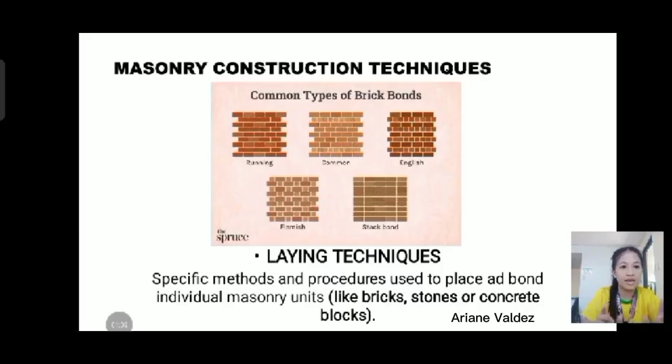While the image doesn't show any actual reinforcement, we can discuss how the different bonding patterns might lend themselves to different approaches to reinforcement, and how their structure affects strength.

Now we have running bond. We need to remember that running bond is the simplest and most common bond. It only consists of lengthwise bricks and vertical joints between bricks. Because we see so many vertical joints, the running bond benefits more from frequent horizontal reinforcements like ladder or truss mesh to prevent cracking along these weak planes. But that doesn't mean we don't need vertical reinforcement. We also need vertical reinforcement at corners and intersections. So running bond is used in residential buildings, garden walls, landscaping, interior, brick veneers, or paving and patios.

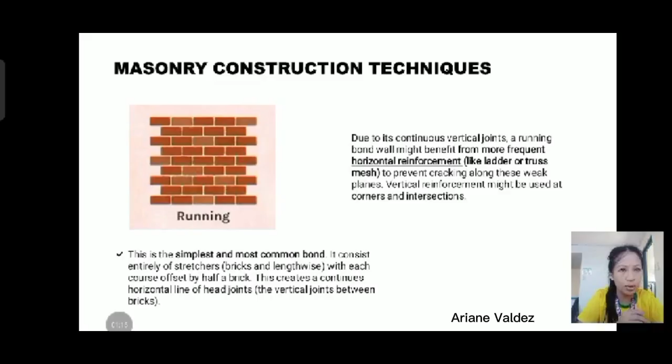Next we have common bond, also called American bond. This bond features courses of stretchers with a header course, bricks laid with their short ends facing out at regular intervals. The header courses help tie the wall together laterally. When we say laterally, there's one row with the long side, then right above or below it, the short ends of the bricks. So looking sideways, there are straight rows of either short, short, short, then long side, long side, long side. So laterally, common bond needs horizontal reinforcement. The difference from running bond is that it's slightly further apart compared to running bond.

When it comes to vertical reinforcement, common bond is the same as running bond. Common bond is used for residential exteriors, historical restoration, garden and decorative walls, and also non-load-bearing walls.

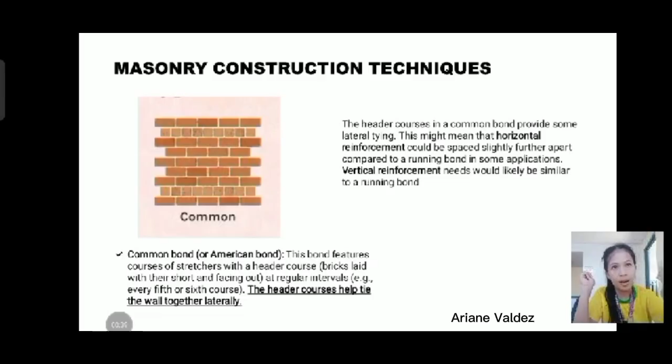Next we have English bond. This bond alternates courses of headers and stretchers. The head joints in the stretcher courses are centered above the stretchers in the course below. This bond is known for its strength. We see headers, then after the headers, long bricks, alternating bricks. This alternating of headers and stretchers creates a very well interlocked wall, offering good inherent strength. This robust interlock could potentially reduce the need for frequent horizontal reinforcement compared to running bond in some less demanding applications.

Vertical reinforcement would still be important in English bond. This bond is used in load-bearing walls, engineering projects, and traditional buildings.

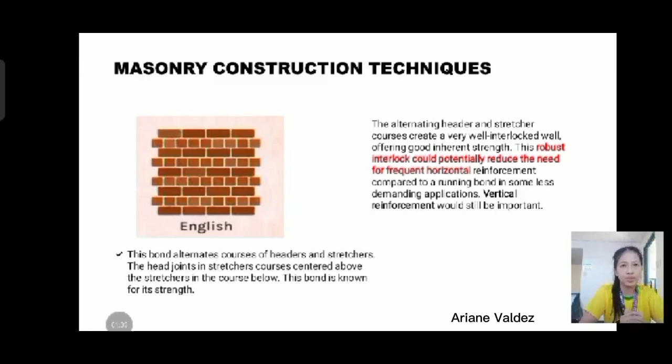Next we have Flemish bond. Here we see the headers, the small bricks, placed right in the middle of the long bricks. Similar to English bond, the stretchers alternate with headers in each course to create strong and well interlocked structures. The potential need for horizontal reinforcement might be comparable to, or slightly less than, a running bond in certain scenarios. Of course vertical reinforcement remains important.

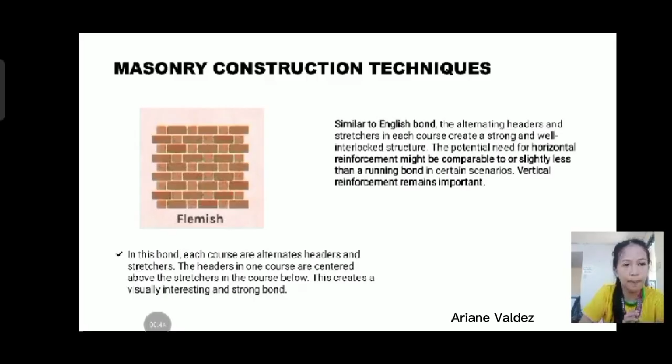And lastly we have stack bond. Stack bond is a purely decorative bond where bricks are laid directly on top of each other with continuous vertical joints. It offers the least amount of structural strength on its own and typically requires additional reinforcement. Because it has continuous joints, stack bond has very little inherent lateral strength, and as we discussed earlier about what lateral means, it almost always requires significant reinforcement, both horizontal and vertical.

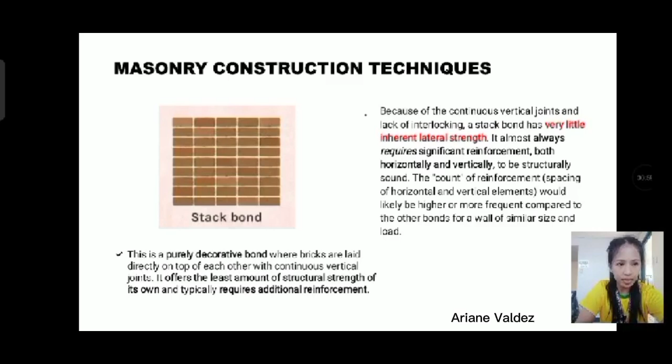Now let's talk about how they differ in strength. English and Flemish are generally considered the strongest inherent bonds due to excellent interlocking of headers and stretchers in alternating courses or within the same course. They distribute loads effectively. Next is common bond, which offers good strength due to the header courses tying the wall together laterally. Its strength is generally better than a running bond.

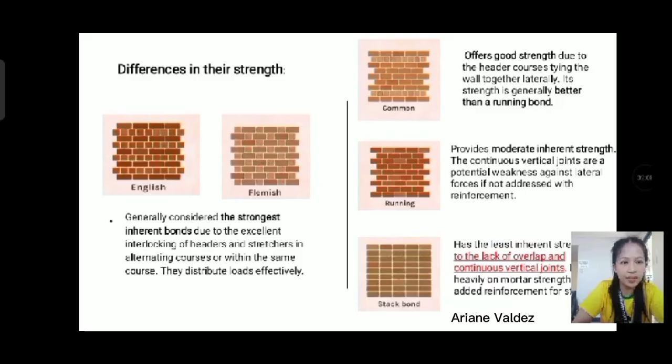Next is running bond. It provides moderate inherent strength with continuous vertical joints, which can be a potential weakness against lateral forces if not addressed with reinforcements. Lastly, the stack bond has the least inherent strength due to the lack of overlap and continuous vertical joints. It relies heavily on mortar strength and any added reinforcement for stability.

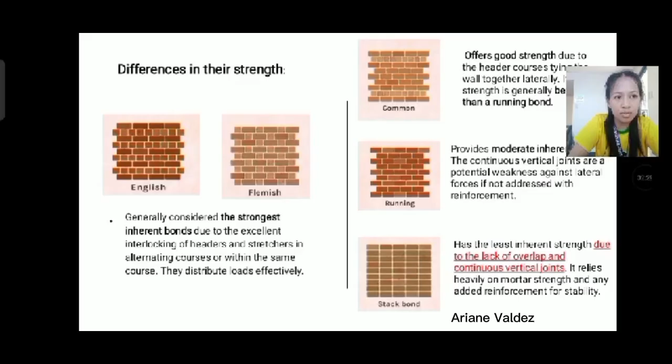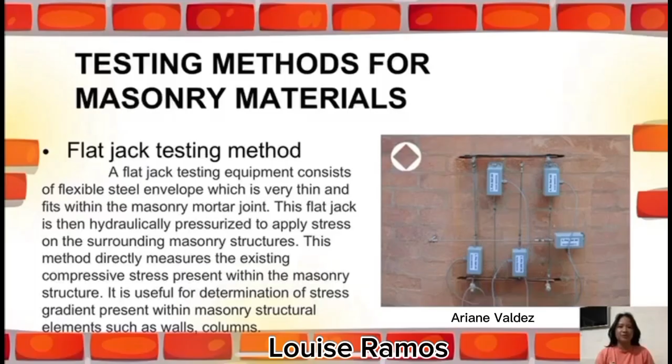These are the testing methods for masonry materials. The first is the flat jack testing method. It works by creating a slot or cut in masonry, typically along a mortar bed joint, then inserting the flat jack. The flat jack is pressurized using a hydraulic pump, gradually increasing pressure until it is restored to the condition before the cut. This method directly measures the existing compressive stress present within the masonry structure. It is useful for determining the stress gradient present within masonry structural elements such as walls and columns.

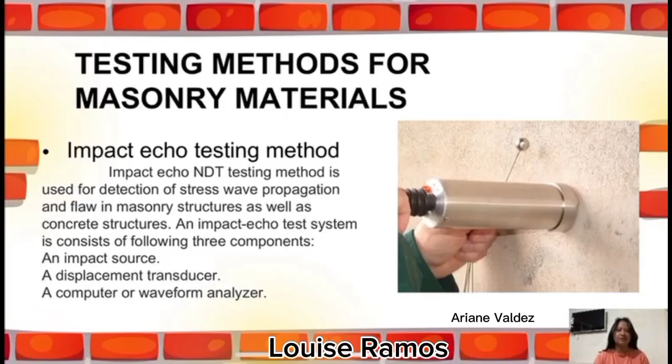The second testing method is the impact echo testing method. In this method, you tap a steel bar that generates stress waves traveling through the masonry material. It can be used to accurately measure the thickness of masonry walls and to locate internal defects such as cracks, voids, and honeycombing. The next method is the impulse radar testing method. It uses electromagnetic waves to assess masonry structures by identifying voids, cracks, wall thickness, structural composition, and moisture content.

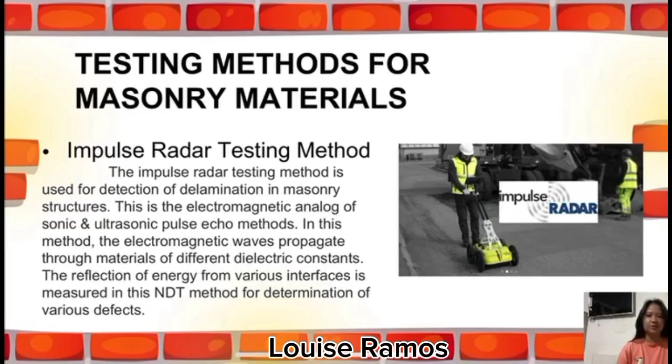The next testing method for masonry materials is infrared thermography. This non-destructive test is conducted to determine subsurface delamination in masonry structures. It is also used to detect internal voids and cracks. The infrared thermographic method gives a fairly accurate picture of the condition of masonry elements inside and can be effectively applied to larger surfaces.

Infrared thermography is a way to check for problems inside brick or stone walls without having to break them open. It uses a special camera that sees heat, because damaged areas like cracks or hollow spots have a different temperature than the rest of the wall. The camera can create a picture showing where these problems are. This is helpful for checking large areas quickly and getting a good idea of the wall condition.

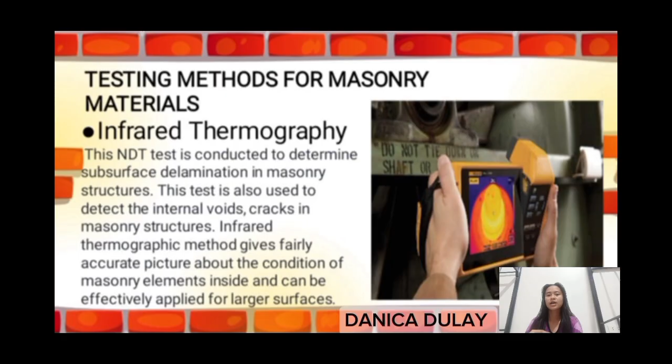Next, the borescope method for masonry structures. Borescope method is commonly used for concrete and masonry structures, and also for steel structural elements. A borescope is used to look inside inaccessible or small voids. It can be used to gain information on the depth of the outer layer of bricks or natural stones, and it can provide information on the filling materials in between arches. It may also be used to examine the mortar between bricks or natural stone.

So, a borescope is like a tiny camera on a flexible tube. It's used to look inside hard-to-reach places in buildings, like the spaces between bricks or inside arches. This helps inspectors see how deep the bricks or stones are, what's filling the gaps, and how well the mortar, the glue holding the bricks together, is doing.

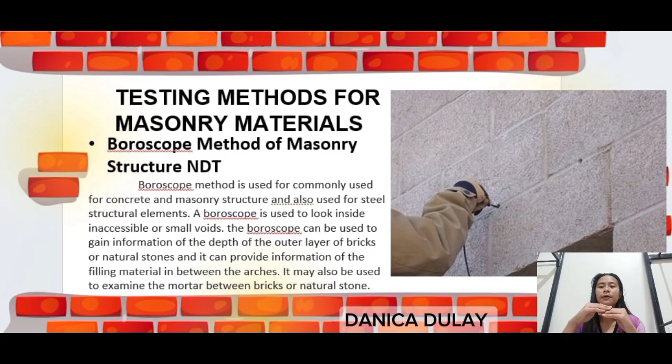Hello, I'm Marc Ian Locquiao, and I will be discussing quality control in masonry construction. Quality control refers to the systematic process of ensuring that all aspects of masonry work meet predefined standards, specifications, and guidelines.

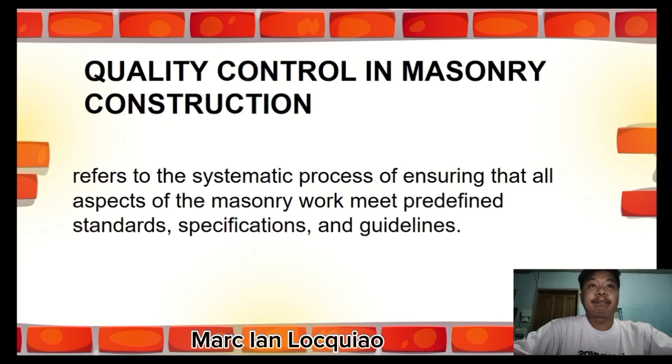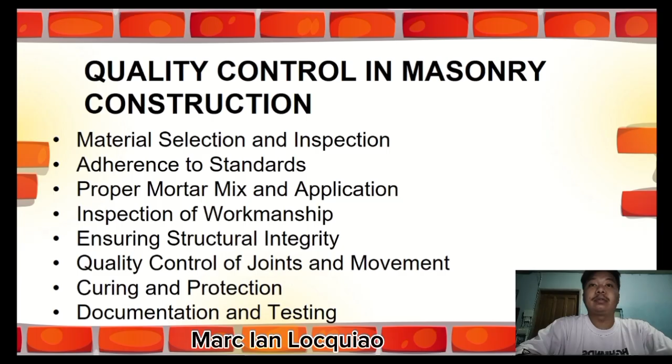Let's start with material selection and inspection. Ensuring that all materials such as bricks, blocks, mortar, and reinforcements meet quality standards. This includes testing materials for strength, consistency, and suitability for their intended purpose.

Adherence to standards: following established standards such as those set by ASTM, the American Society for Testing and Materials, to ensure that materials and construction practices are in line with industry requirements.

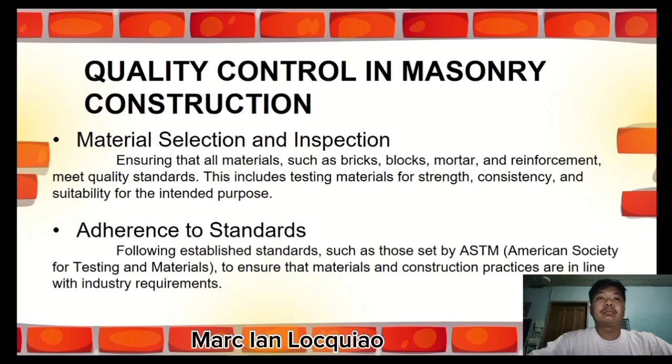Next, proper mortar mix and application: controlling the mix ratio of mortar, ensuring that it's mixed to the right consistency and applied correctly to bind the masonry units.

Inspection of workmanship: regularly inspecting the workmanship during construction to ensure that masonry is laid correctly, with proper alignment, bond, and spacing between bricks or blocks.

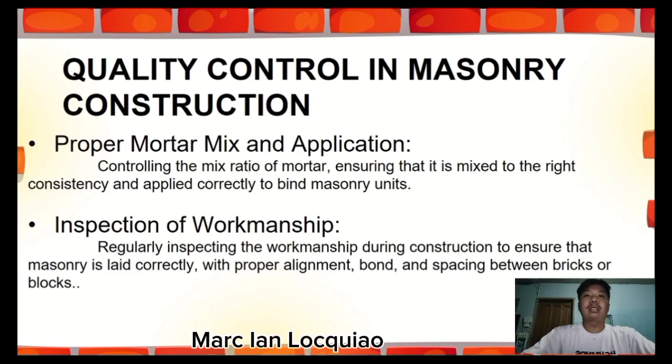Ensuring structural integrity: monitoring the installation of reinforcements such as steel bars or mesh to ensure the structural stability of the masonry work, especially in load-bearing walls or areas subject to stress.

Quality control of joints and movements: ensuring that joints are properly spaced and filled, and addressing issues related to expansion or contraction of materials, which can impact the structural performance of the building.

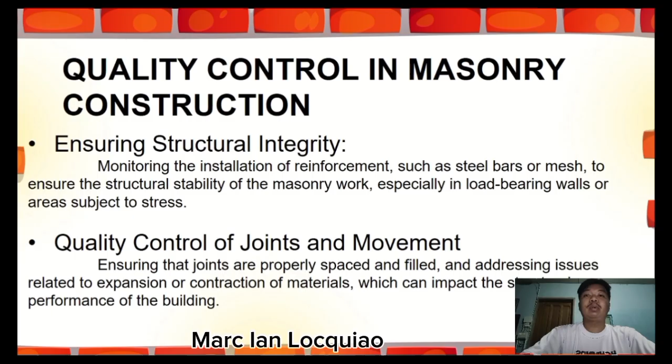Next, curing and protection: proper curing of masonry units to achieve maximum strength and protect them from environmental factors such as moisture, freezing, or drying out too quickly.

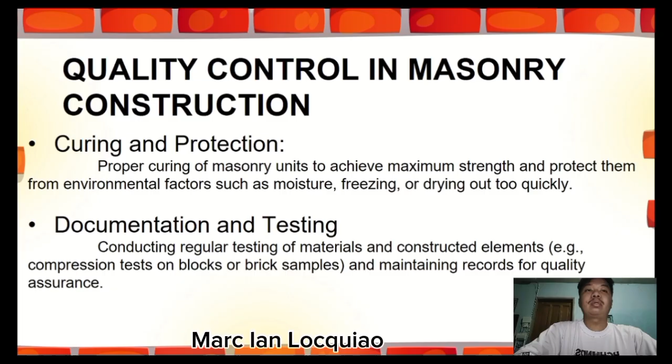And lastly, documentation and testing: conducting regular testing of materials and construction elements, such as compression tests on blocks or brick samples, and maintaining records for quality assurance.

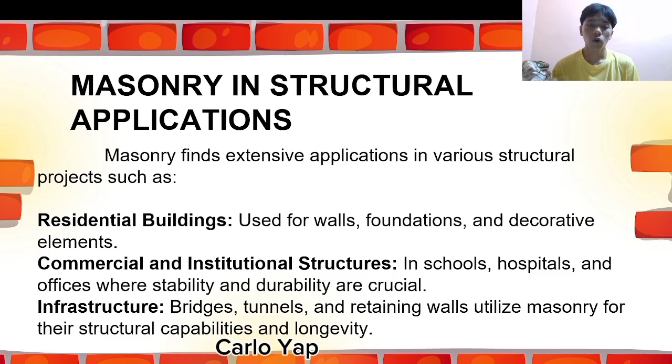So next, these are the three structural applications of masonry: residential buildings, commercial institutional structures, and infrastructure. Next is sustainability in masonry.

Masonry is a sustainable building material. It is recyclable, energy efficient, and can withstand weather extremes. Masonry provides energy efficiency, long life cycle, lower life cycle costs, and resilience following natural and man-made disasters. Masonry is a restorative material with a low impact on the environment. Existing masonry structures can be improved to minimize carbon emissions from buildings.

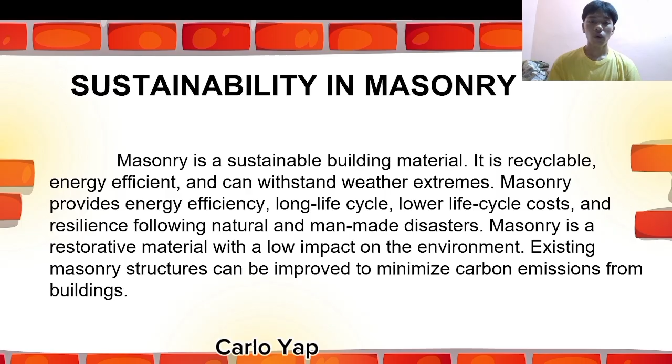Last is that existing masonry structures can be improved to minimize carbon emissions. Retrofitting older masonry buildings with insulation or energy efficient windows can improve their performance. For example, older concrete buildings in the Philippines could be retrofitted with insulation on the exterior walls or with reflective coatings to reduce heat absorption and lower cooling costs. That's my report, thank you.

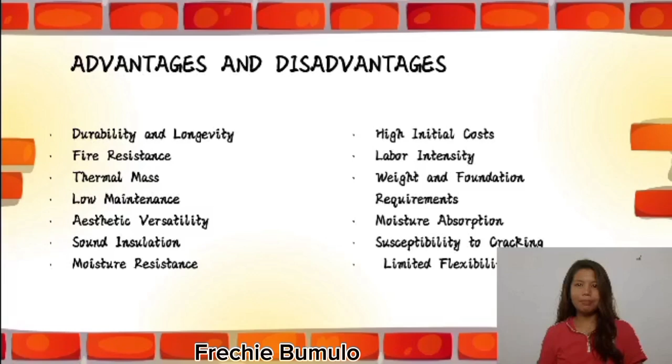First advantage is durability and longevity. One of the biggest advantages of masonry is its exceptional durability. Masonry materials are incredibly resistant to environmental damage. Brick and stone structures can withstand extreme weather conditions including high winds, heavy rain, and fluctuating temperatures without deteriorating. It also has a longer lifespan than many other materials. Well-maintained masonry buildings can last for centuries, making masonry an excellent investment for those looking for a long-term, low-maintenance solution.

Second is fire resistance. Masonry is inherently fire-resistant, making it a safer choice for homes and commercial buildings. Brick and stone do not burn or contribute to the spread of fire.

This added layer of protection can help prevent extensive damage in the event of a fire and may even lower insurance costs. An example of this is the firewall. A firewall is a fire-resistant wall designed to prevent the spread of fire within a building, allowing occupants time to evacuate and preventing structural collapse.

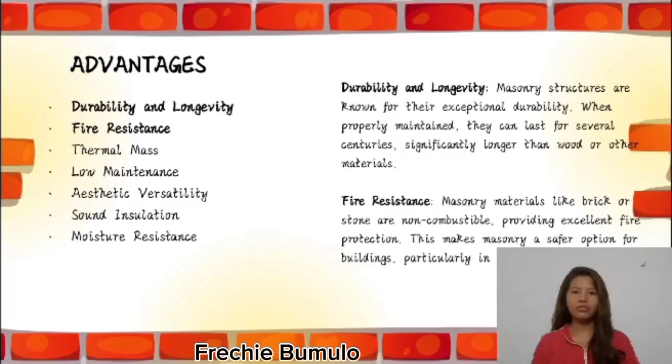The third is thermal mass. Masonry materials offer superior thermal mass, meaning they absorb, store, and gradually release heat. This helps regulate indoor temperatures, keeping buildings cooler in summer and warmer in winter. As a result, masonry structures require less energy for heating and cooling, leading to lower utility bills and increased energy efficiency. Masonry creates a more stable indoor environment.

This can be especially beneficial in regions with extreme temperature fluctuations as it helps maintain consistent comfort levels inside the building. So advantage number 4 is low maintenance. Masonry structures require significantly less maintenance, only occasional cleaning and repointing of mortar joints to maintain its appearance and structural integrity.

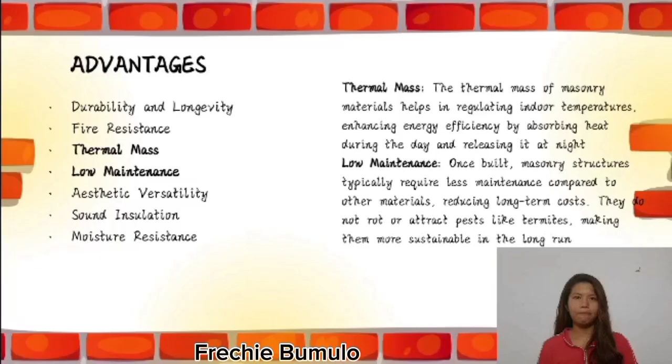Though masonry construction can have a higher initial cost, its longevity and low maintenance requirements make it a cost-effective choice in the long run. Homeowners save money on repairs, replacements, and energy costs over the lifespan of the building, making masonry a smart financial investment.

Number 5 is aesthetic versatility. Brick, stone, and concrete masonry offer timeless beauty and design flexibility. Masonry maintains its classic appeal for generations. Whether used for traditional homes, modern commercial buildings, or historic restorations, masonry can be tailored to suit various architectural styles. It also comes in a wide range of colors, textures, and finishes, allowing for customization that enhances a building's curb appeal. Masonry's natural beauty remains intact with minimal upkeep.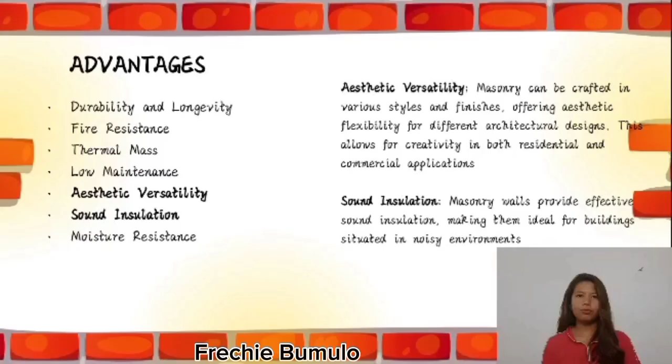Number 6 is sound insulation. Masonry provides excellent sound insulation compared to wood or metal structures. The density of brick and stone absorbs sound waves, reducing noise transmission from outside sources such as traffic, construction, or loud neighbors. This makes masonry ideal for urban environments, multi-family residences, and commercial buildings where noise control is important.

Lastly, it is moisture resistance. The dense and watertight nature of masonry materials safeguards structures and ensures long-lasting durability. Although relative humidity can influence moisture levels to some extent, the acceptable moisture levels in masonry vary, but generally, a moisture content below 20% is considered safe for indoor brick walls.

For exposed brickwork and concrete, 5% is a standard moisture content. Internal brickwork and concrete typically have lower acceptable levels, with 1% and 3% respectively, according to CIBSE Guide A, Environmental Design. Masonry excels in resisting moisture, preventing issues like mold and decay. This moisture resistance reduces the need for extensive maintenance and repairs, providing peace of mind.